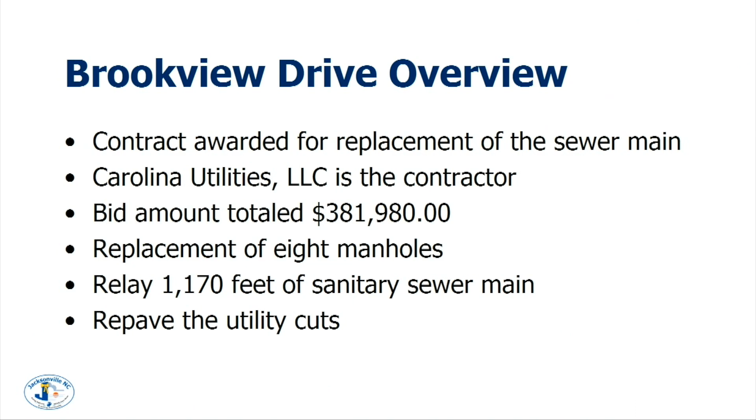Starting the job, we knew we would have a few challenges to consider. One of which is we always have to maintain emergency vehicle and personnel access to the road, the area, and the houses in that area. Generally, we also like to allow one lane of road to remain open at all times. With this type of project, the sewer line was in the middle of the road. Some of the excavations were 10 feet or deeper. We knew that it wasn't feasible to have one lane open all the time, but we did have to allow access to the driveways at all times.

Again, another safety concern is we knew we would encounter deep excavations. And anytime you go underground, we know we're going to have unknown conditions that we won't realize until we start to dig. We also knew that we had existing utilities that were quite old, and we wanted to be careful to ensure we didn't damage or have to replace those during the project.

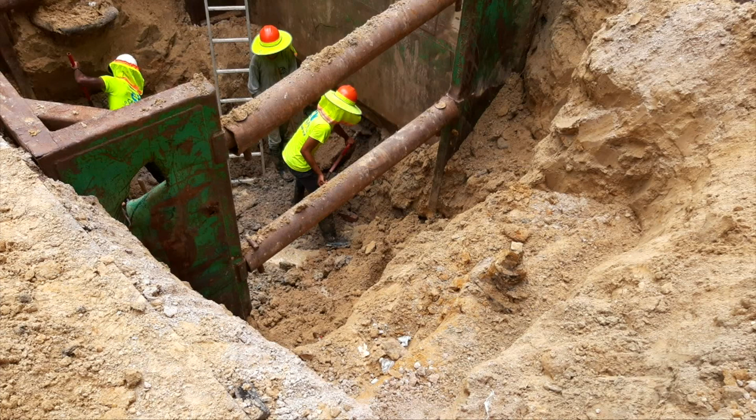The picture you're looking at, this is Carolina Utilities working in a safe excavation. I'll point out their men are wearing PPE. They have a trench box properly in place. As you can see from the exposed side, they've benched the soil back to prevent a potential cave-in. And one other thing I'll point out is they have a ladder behind them, which is required to remain there at all times when men are in the hole to allow for quick escape from the hole should there be an issue.

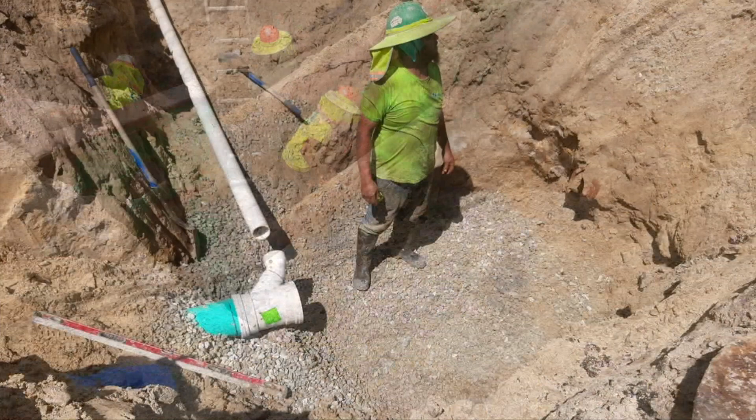One other picture of their men working. The blue pipe that's partially covered up is your main. The 4-inch white PVC running perpendicular to that would be a service to a house. This man is in a safe excavation. This was about 4 foot deep, which would not require benching, but as you can see with the sandy soil, they chose to slope it anyways. And an interesting point of that picture is about his knee height towards the right, you can see the old sewer pipe, which is made out of terracotta, which gives you an idea how old it is.

Project status: we're approximately 75% complete with the job. As we're going along, we're finding that it's near impossible not to disturb the water services. The water line is very close to the sewer line, which was not what we had expected per our as-builts. So as we move along, the services are literally just falling out of the main. So we're replacing the water services to the house as we go.

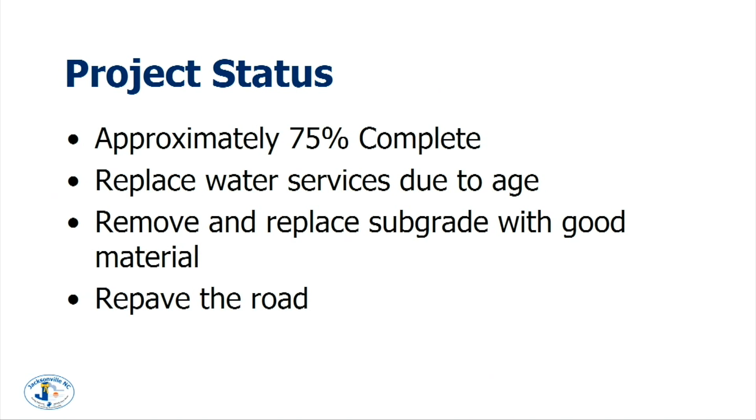Also, where necessary, we're backfilling with good fill material to ensure we have proper compaction. And then as we finish, we intend to repave the road only where the utility cuts were made. Unforeseen challenges that happened during the project were, as I mentioned a moment ago, the water main is much closer to the sewer line than we expected.

And the water main is very old, it's very brittle. And we've had some situations where we have cracked it. We've had to make repairs as we go. As I mentioned earlier, we are replacing all the water services as we go. We're finding abandoned water services that need to be removed and plugged off permanently.

A problem this creates is when we backfill, the last several feet of backfill are very important to ensure we have proper compaction underneath our road before we pave. In this situation, along nearly the entire run of sewer line that's being replaced, the water line is either on top of or very close to the sewer line. It's making it very difficult for us to reach a proper compaction before we pave that road.

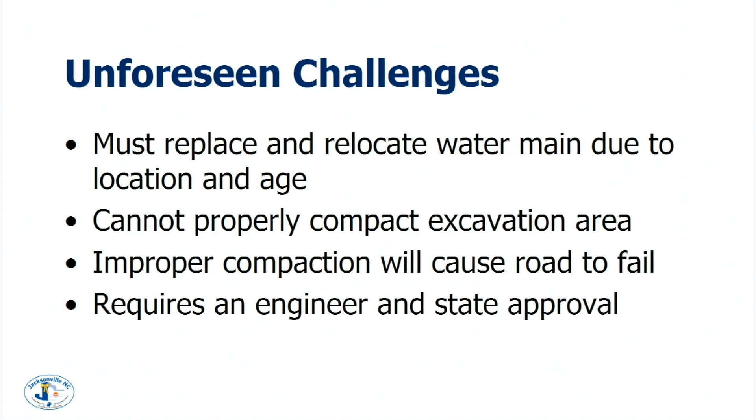When you say on top, you just mean physical location. There is vertical separation. Yes, sir. I'll clarify that. The water line's only about 2 to 3 feet in the ground, while our sewer line is generally 10 feet in the ground. But the state still says that there should be 10 feet horizontal separation, even with the vertical separation. So is that what you're having to do, is make it 10 foot now? So that's what the goal will be, yes, sir.

Part of what we found out in doing this is we need to look at and secure funding to rework some of that water line, which is our last comment. We'll require an engineer to design that system, and it will also require state approval. So the challenge there is it's going to take us some time, so we've got to get an engineer to draw it up.

And on top of that, as Nick mentioned, we were at $382,000 on the project. We only have $400,000, so we're going to be over budget most likely because of this. So that'll take a little bit of time. We will have to go back to council and do a budget amendment to move money into that project. Yeah, that's going to be one of my questions: when you encounter these challenges and you've budgeted so much after you analyze everything, who pays for the extra? I'm sure you have a buffer in there somewhere, right? We do. Not to that extent.

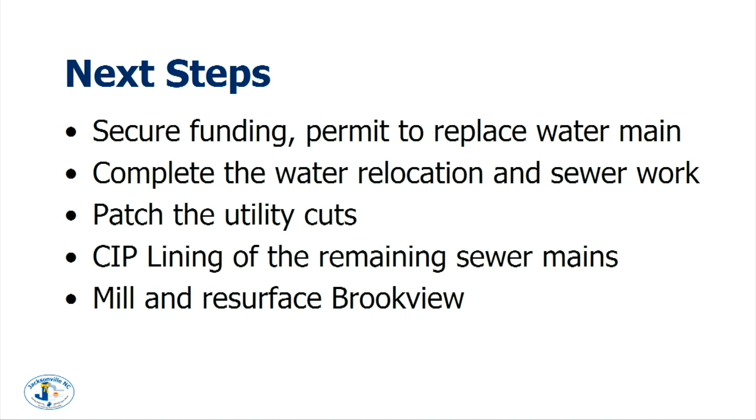We intend to line the remaining sewer line on Brookview. And when all that is done, we will mill, and then we will repave all of Brookview. All of the circle portion of Brookview, because Brookview does go across Decatur. Right. So this would be from the intersection of Brookview and Decatur around the horseshoe to Brookview and Decatur. Right.

Having heard what you said about how close the water line is, is that not gonna still be kind of an issue with the rest of the area, Decatur and all the rest of them? Were you surprised how brittle the water line is? I think we expected the utility to be in the condition it was. What we didn't expect was to encounter it where we did. So had it been where it was plotted some 40 years ago, I would assume, then we probably would have been all right.

Then my question is, if it's there, is this something that you possibly could look at down the road in another section, because all this is brittle, caving in? I mean, it's a hypothetical, I know, but. Well, what we find with the water is typically, as long as you keep pressure on it and you don't disturb it, it does fairly well. It's when you start disturbing around it that really causes the problems.

And unfortunately, we do our best to, I'll say as a city staff, one thing that I truly despise is when we repave a road and within 3 days a water leak pops up. And it happens more frequently than you would think. And the problem is that water, people say, well, why didn't you replace it while you were there? Well, while we were there it wasn't a problem. Right. But you could say, well, maybe we should look at replacing the water line before we pave. But you're talking 1,170 feet. Now it's sewer, so it's more expensive. For $380,000, we can't afford to replace all the water line before we pave.

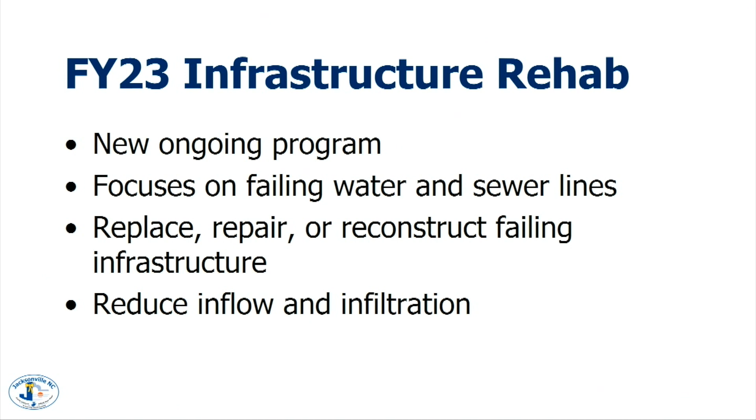The whole point of that is to reduce the inflow and infiltration. Like if you have separated joints, that's where you'll get those sinkholes, because not only is it going into the pipe, but it's separating around, losing that ground. This kind of came about because of road work. We go in there, we repair, and then we have an issue right after. That's not a good way to spend our money or our staff's time who are out there doing these repairs constantly. So this is a way for us to try to save time and money. So we go in there, make those repairs to whatever water and sewer lines we have, and then we'll go back and repave those streets.

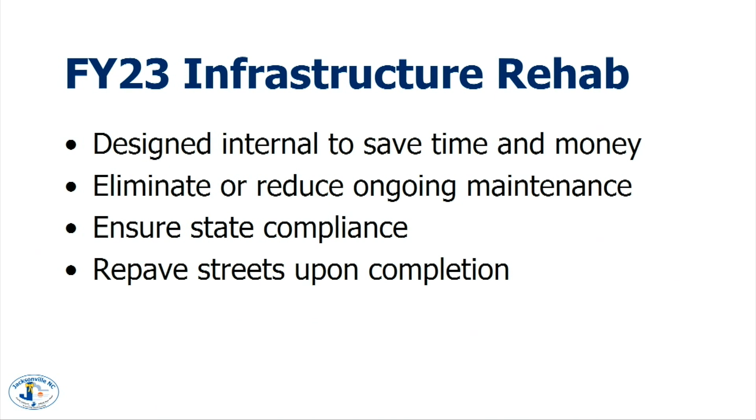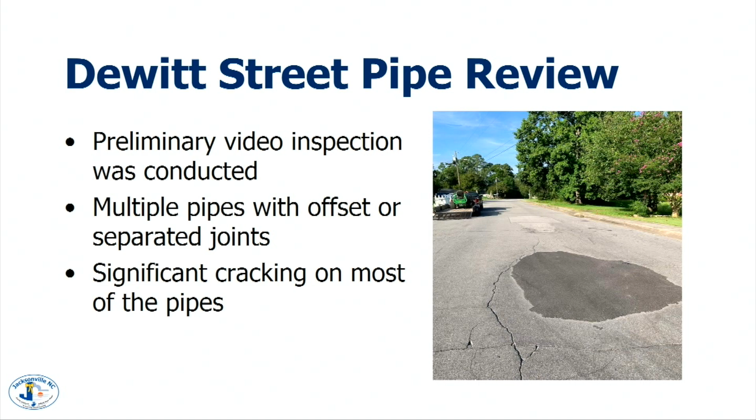So there's a couple areas that I have no doubt we'd have to probably remove and replace. There's some other areas looking at it, there are cracks. Those could be lined, it just depends. So, before you leave that one, can we go back? Yep. Go back one more.

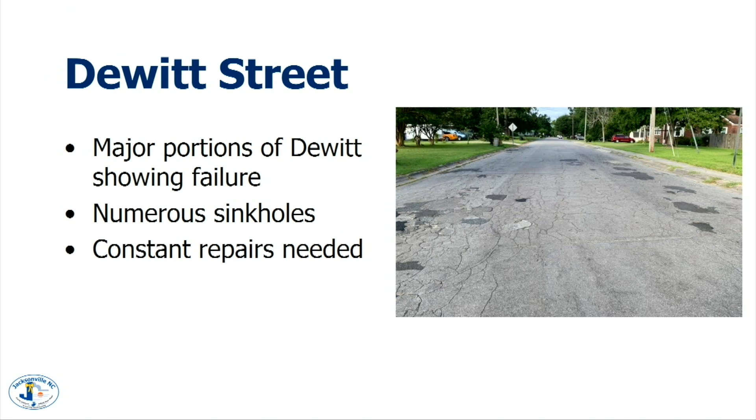So DeWitt is probably one of the worst graded streets we have in the city, especially for the traffic volume that we have on it. And it's been on our street rehab list for a while. Obviously you can see the challenges that we have there. The real challenge is it doesn't do us any good to go in and repave a street without fixing the underlying problem. And it's pretty obvious what the underlying problem is: the sewer line. So we're working on getting everything pulled together so that we can move forward.

What I'll say, and I don't remember this being in there, but for this project we have right at $1 million. Given the cost of Brookview, I can honestly say I don't know if $1 million is enough. So after Randa and Nick and our utilities maintenance staff are done reviewing all of the camera work, and when we say camera work, we video the inside of the sewer lines and inspect them, and we decide how much actually has to be replaced, how much we can actually line, then we will move forward with the sewer and water work that has to be done before we ever talk about coming back to repave it.

Do you have any vague idea of when that could possibly happen, in case somebody lives on DeWitt and is watching, saying, when are we going to inspect this? I know that this is a high priority for the engineering staff in trying to decide what to do. The information gathering and inspection of all the lines and analyzing of the data does take time, because you send somebody out there to camera it, and they do camera it and note things, but then you have people that come back and pull out specific areas and say, well, we need to go pay more attention to this.

And for those that are wondering where North Bayshore is, it's right across the street from City Hall, in front of I think it's the Pentecostal Church. Yes. It's my neighborhood. I grew up in that neighborhood. So it's almost directly in front of the Pentecostal Church. Yeah. And I think across the street is the United Way. Yes. Right. So it is kind of isolated to that area, or at least the worst parts are. So it just gives you an idea of where that section is.

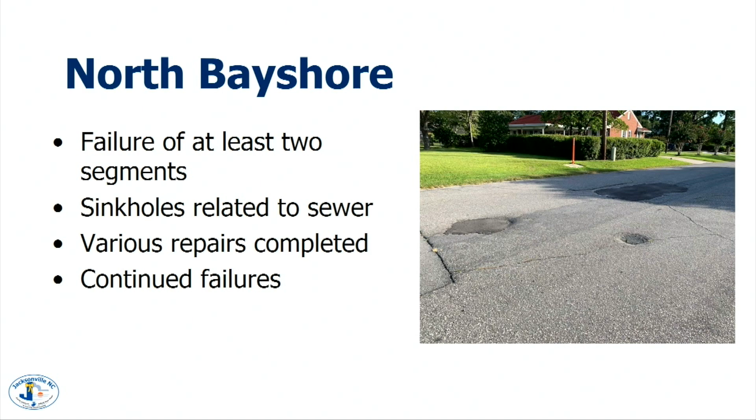There's been multiple cave-ins over there, and on the other picture, let me go back really quick. You can see there are a few right there, but even the ones that have been repaired, they're already failing again. It's just constant work for them. They said that they're out there all the time. I looked at the video today. Like I said, they could barely get it in because what they're assuming is joint separation or some sort of large crack that's allowing sediment to get in there. They could not get the camera past that, so I can't really see a whole lot, but the work will replace the manholes and the sewer main as well.

So again, right now, it's reviewing the reports we have. I'll make a few more trips out to both roads just to make sure I know which ones I really need to focus on, watch the videos or read over the reports. And then from there, I think we would need an outside engineer to design it because of the type of work we're looking at. But that's something I'll have to sit down and discuss. My goal is to get these out, get everything ready, and hopefully have it out to bid in October. It'd be the end of October, but that's it.

Yeah, because that was gonna be one of my questions. There's a lot of work to be done out there, and I'm thinking staffing. I know we're understaffed, and when you say bidding it out, that means you're gonna hire another company to come and actually do the work, because I know with the staff here, we can't do this amount of work. Yeah. Thank God for those videos, you get to see. We got a class on it a couple of meetings ago on how those things work. That saves a lot of manpower right there, just knowing where you're going, and if you can't get that video through there, could you imagine how bad it is?